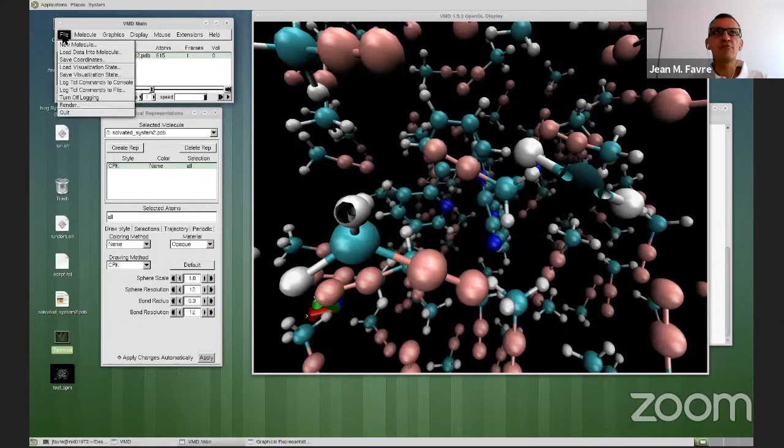Okay, people should be seeing this particular desktop I have here. So basically, I have here the VMD application, which is used for molecular science, and I am running here a simple model showing you how the 3D graphics is working inside the remote desktop. So let me quit the application because I want to point out the look of it.

So this is the remote desktop. As you can see, you have your full home mounted on the node. You also have, as you can see here, the GPU available. So this is Piz Daint. So we have the driver 440 from NVIDIA running on the GPU.

Now, we are inside the VNC desktop, so all applications should be run with the vglrun prefix, as you would know. So I run vglrun, the name of my executable, this is VMD in that particular case.

And as you can see from my console display here, indeed, here we have the GPU and the multi-threaded characteristic of our compute node detected correctly, 24 CPU threads detected, and a CUDA device, which is here the Tesla P100 node.

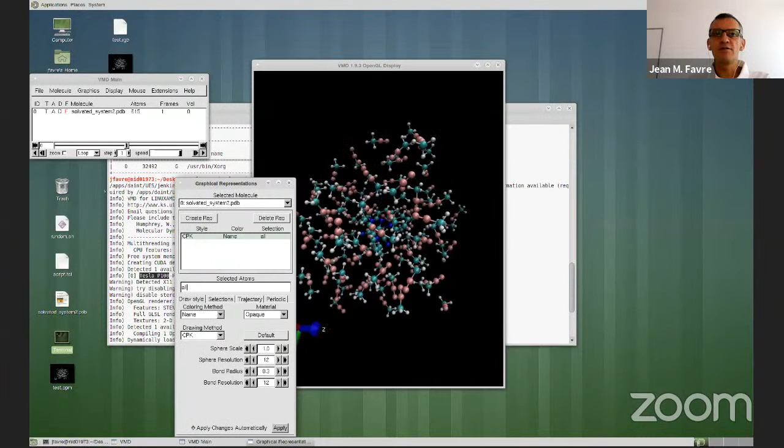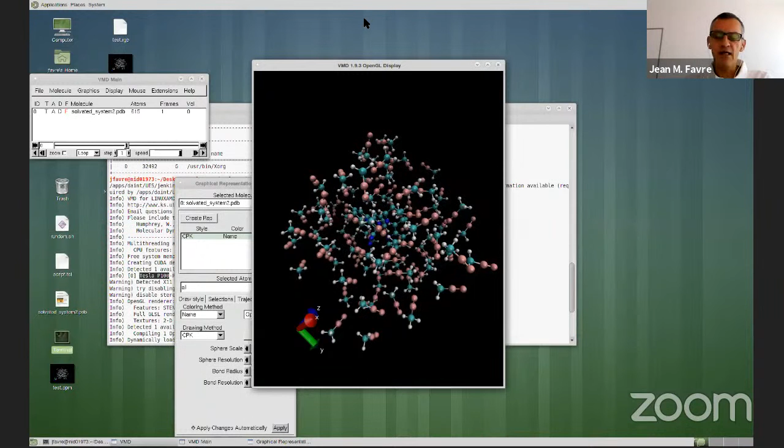All right, so that's basically it for the demonstration of the VNC desktop. As you can see, I have really the full applications available to do graphics. So VMD is a pre-installed package. However, you are free to run any other package requiring OpenGL and an X server.

All right. I'll come back here and share again my other presentation. Let's see. This should be just a second. Okay. This is what I'm sharing now. So I'm back on the VNC remote desktop page.

Very good. Now, VTK, since you are watching this particular webinar, I imagine that you've heard about VTK, right? VTK is, from my point of view, basically everywhere. There's not a single day that I am at the office without me using some parts of VTK. Now there's a nice address here, VTK in action, on seeing the different uses of VTK.

Now VTK is both, how would I say, a library. It's also a data format. VTK is at the base of it a C++ library, which is available in VisIt, in ParaView, and in Jupyter Notebooks, as we will see in the rest of our presentation today.

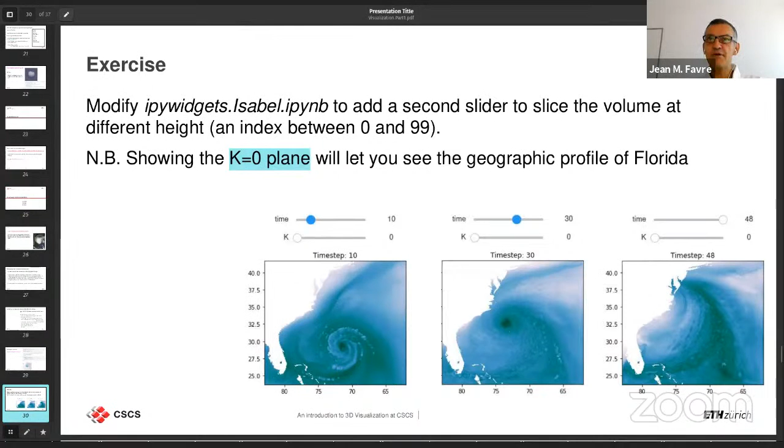So let me switch to the Jupyter notebook, which I have live, and it should be this one. IPywidgets is this one. There we go. So, basically what I've done here is, this will take indeed a few seconds, maybe a minute, because we have to load 48 time steps. And what I recommend is that you change here, for example, this time argument to do a subsampling in time of your animation. This would be much quicker to go through the animation.

All right, I will try to finish in the next few minutes. So I will introduce the next demonstrations while this particular demo is loading. All right.

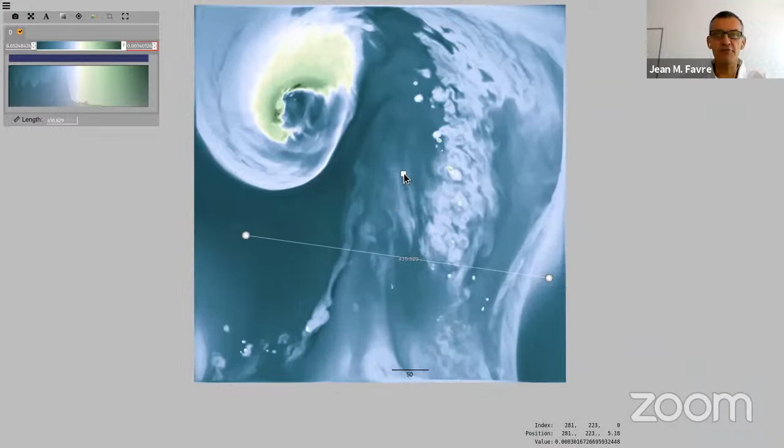If I bring back my panel, you can see here I have a whole choice of different color maps, etc. to use. And I have a measuring device; from here to here, for example, would be size 410, and I have different options. One last interesting option is the full screen option. Here you should see my data really at the full screen available. So this for the standard view.

I'm going now to the line profile presentation. So I have the same view again, but I have an interactive widget. Perhaps I should make my screen a little bit bigger. This widget allows me to profile the data at any point in space along my image. So that's a nice interactive tool. And because this is a standard Matplotlib family of widgets, I can always save that image to my desktop, and I can do different zoom, etc., as you can see here, inside my particular function.

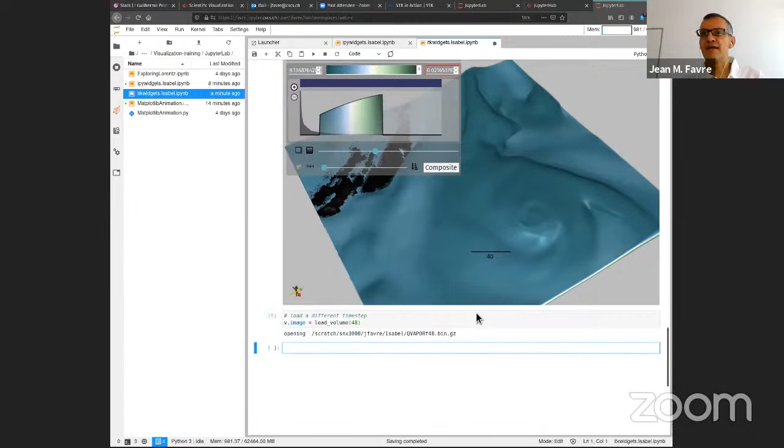The last demonstration to do here is with the load volume. So I'm going to load the volume at time step number 1, and I'm going to display that volume here in 3D. So I now have a full 3D rendering of the volume. Of course, it's a very flat volume because it's atmospheric data. And this is time step 1. If I go now to my time step number 48, there we go.

We can see that the hurricane has developed further, and we have a full 3D view of my data. Now, the interesting thing is that we have a completely interactive way of manipulating the rendering. As you can see here, I can really interactively search through my data set to look at particular features using volume rendering. So this is something we will do further this afternoon to look at 3D volume rendering of data.

In summary, these ITK widgets give us the possibility to do 3D rendering, as I have here in this particular cell, line profiling in 2D with any data set, and we can do more. We can do 3D rendering of polygonal data, 3D rendering of point set data. So we really have a lot of options available, and I encourage you to use that.

This is developed actively by the Kitware company providing VTK and ParaView. So this is really a nice addition to the family of tools which the Kitware company gives us.

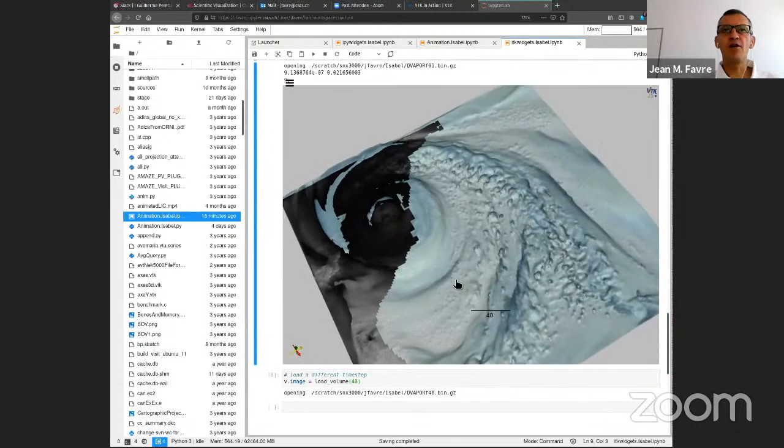This gives me a live 3D object where I can modify at will the characteristics of the 3D volume rendering and also the time step.

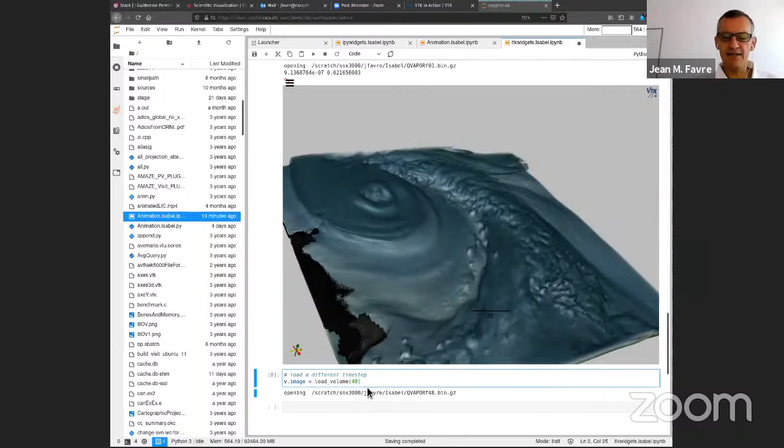We said that the hurricane hit the ground at time step 40, more or less. My notebook is not live at the moment, so I currently have only the cached version of the 3D data.

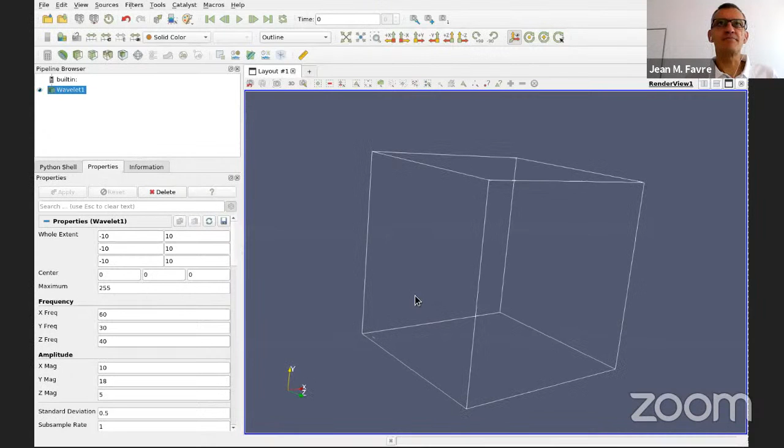I'm going to explain a little bit what we see. First, let's go to a wireframe model here. We see a cube, and we can count how many grid points we have here in each dimension. We have 21. Why is that? It's because I used the default value of whole extent here, between -10, +10, -10, +10, -10, +10. That gives us exactly a volume of 21 cubed.

If we look at, so basically, what are those numbers? Those are the IJK indices in your grid.

If I look at the information tab in my wavelet, I see indeed a resolution of 21 cubed. I see the X coordinates, which are the bounds - the X, Y, and Z coordinates range between -10 and +10. And then we see one data array called RT data, of type float, with a particular range between 37 and 276. This is the range of the scalar data available.

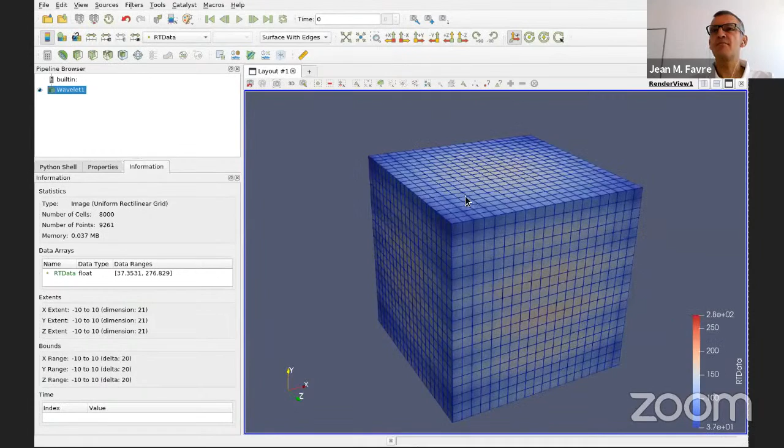Now, if I go to that particular drop-down menu here, I can select the variable RT data, and I will color my grid with the data indeed. Then we remove the wireframe, and we see a block of data, a volume of data, colored from blue to red, in this particular fashion. Let me look, I see there are some questions here, perhaps.

Questions? Yeah, I'm not sure I can answer those questions at the moment. So let me continue with my presentation here.

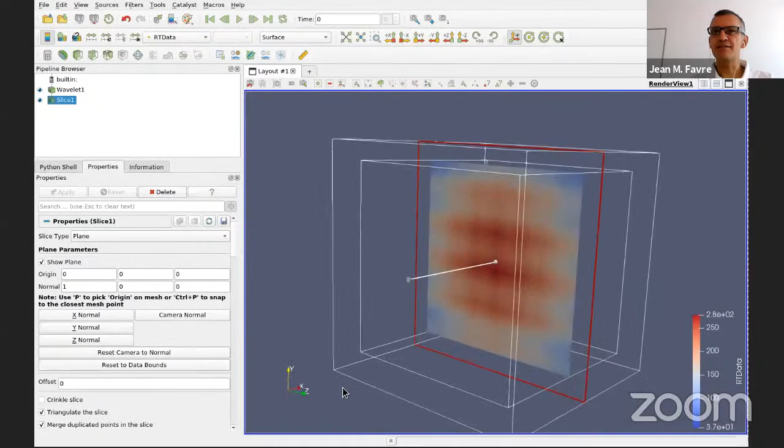Now, I can turn back the display of my object here to an outline mode, and I can look inside the data. I would use, for example, the slice here, which by default would be the X, the slice perpendicular to the X axis. I can also switch to the Y axis in that particular fashion, or to the Z axis. Or I can do something completely free, like this, and I have an arbitrarily oriented slice through my data.

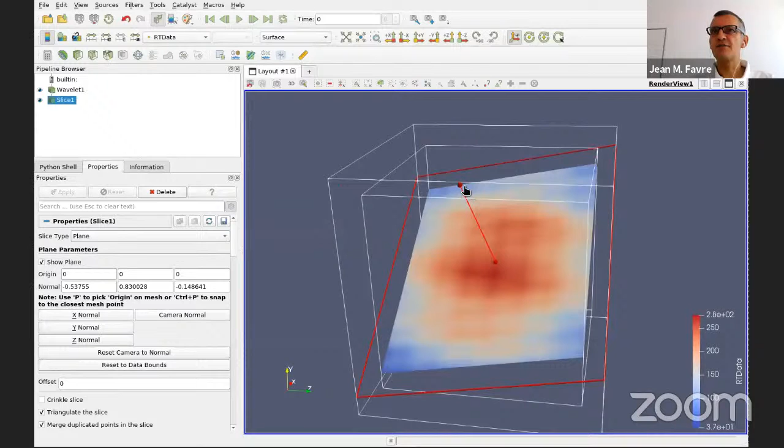Now you notice that every time I change this here, I have to click the apply button. This could be pretty cumbersome. If you have some pretty quick computation to do, you can switch ParaView to an auto apply mode. So in that particular fashion here, as you can see, I have an interactive slicing tool through my object. Here I'm rotating the object in 3D. I can also translate the object, etc. Okay, very good.

I'm going to delete the slice and think again about this volume of data. Now, a grid of size 21 cubed is very small. Let's make it bigger. I will go from 0 to 511, to 0, to 511 again. Now you notice that I'm counting, this is 0 based. So when the extent of the grids are 0, 511, it actually means 512 grid points in each direction.

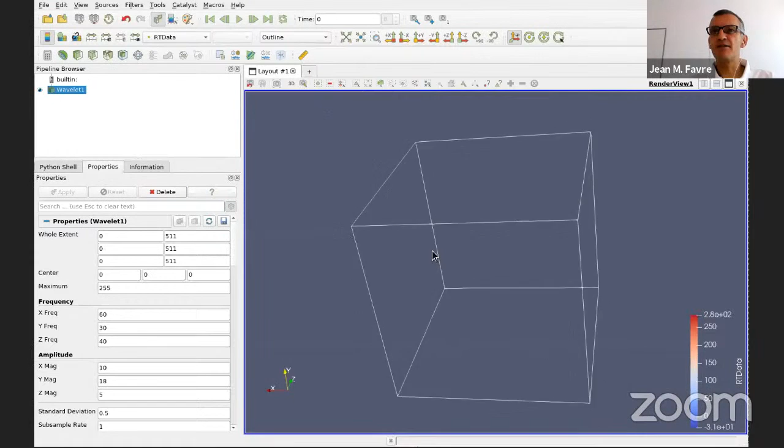So there's now my new volume. If I look at the wireframe, it will be, as you see, a lot more dense, and it's only if I zoom in quite a lot that I see the wires and I see each grid point.

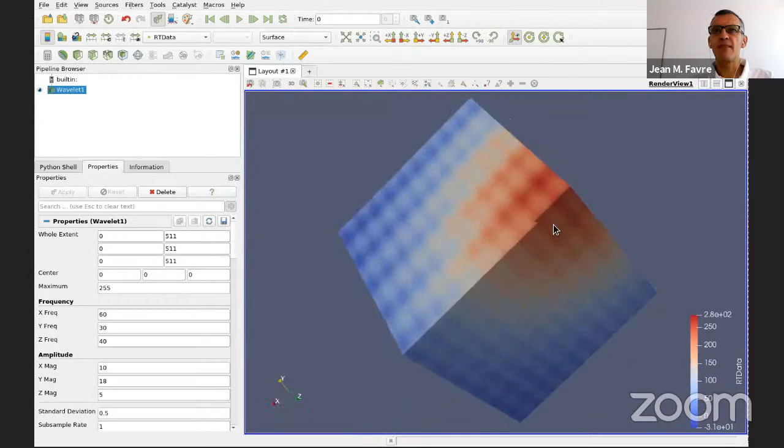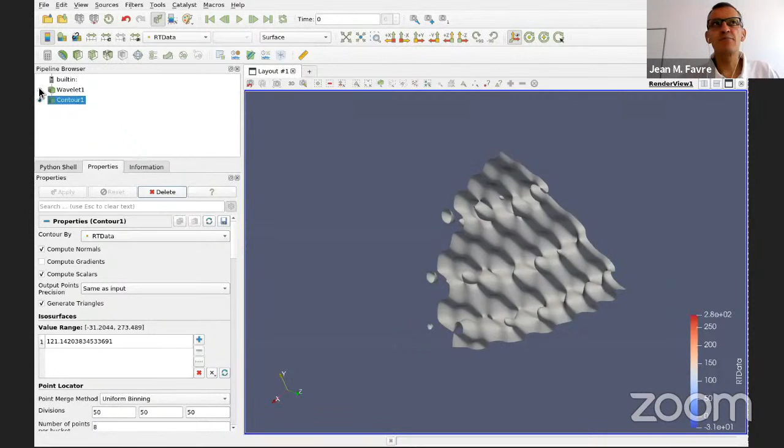Now, another way to look at this particular volume of data would be to look at a contour surface. Now, we've seen two things here happening. By default, in ParaView, when you add an additional filter here to this pipeline browser, the visibility of the object above it is turned off. So I can turn it on again by clicking on that particular eye icon.

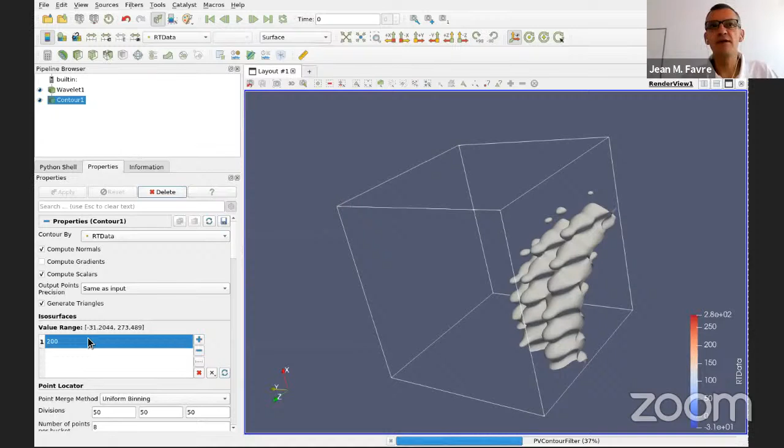Switching it to the outline mode, and now you can see that I have an ISO surface inside the 3D volume. As I move, as I select, as I change the value of this ISO contour, I have here a different ISO surface. Okay.

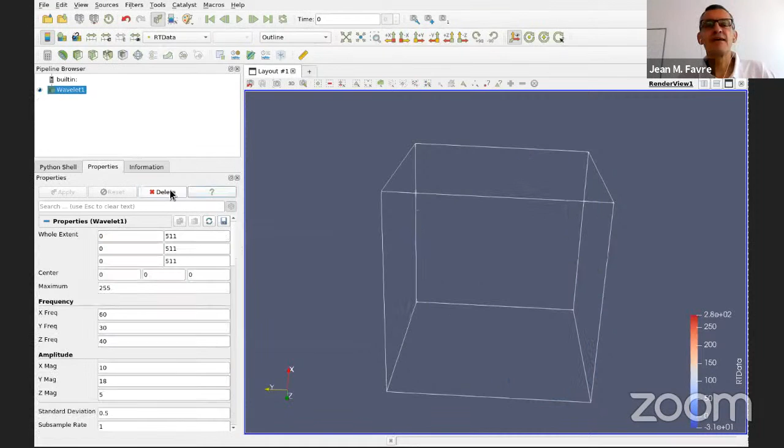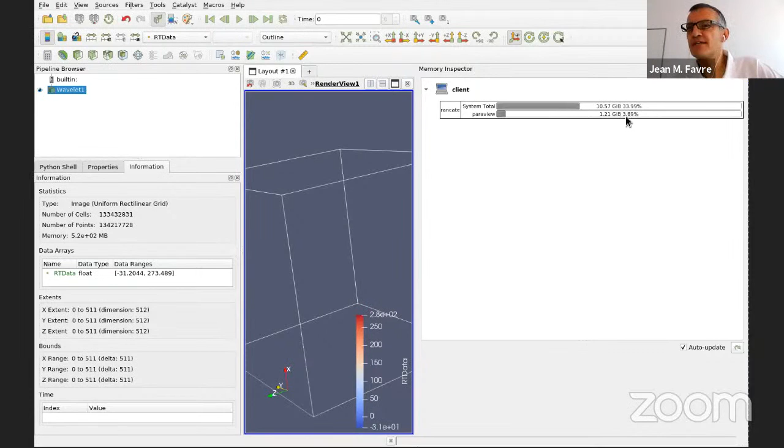Now I'm going to get to the point of storage and data format. Back to my volume: the size of my grid is 512 cubed, and ParaView tells me it takes 520 megabytes of storage. I can look at my memory inspector, and it tells me that ParaView is using 1.2 gigabytes of data to load my data. Well, fine.

That's good and well. Now I want to load this data in parallel, so I'm going to save it to disk. This is something you can do on your own desktop as well. If you do save data, here I have different options.

And there comes the question of data format. Which data format should I use? Should I use XDMF? XDMF is a combination of an HDF5 storage and an XDMF descriptor, which is an XML-based file format. Or should I use TIFF? Should I use PNG? Should I use the legacy VTK file format? No, I'm going to use the meta image MHD file format.

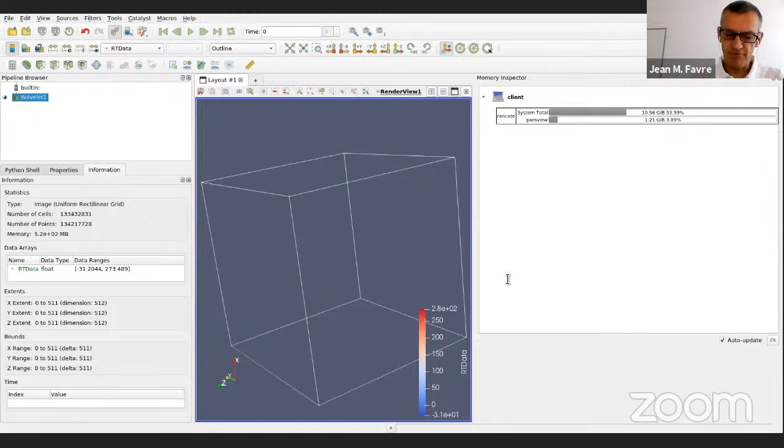So I'm going to call this volume.mhd. And I'm going to quit. Oh, it takes a few seconds, I guess.

I seem to have frozen my application here. Just a second, bear with me, folks.

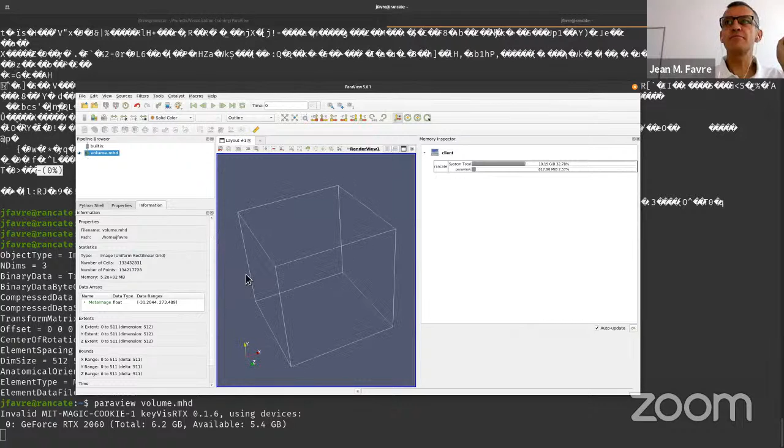Now, do people still see my ParaView desktop here, my ParaView application? Yes, okay very good, thank you. So there's my volume, and there's no problem with it. I can still color with the data as I did earlier.

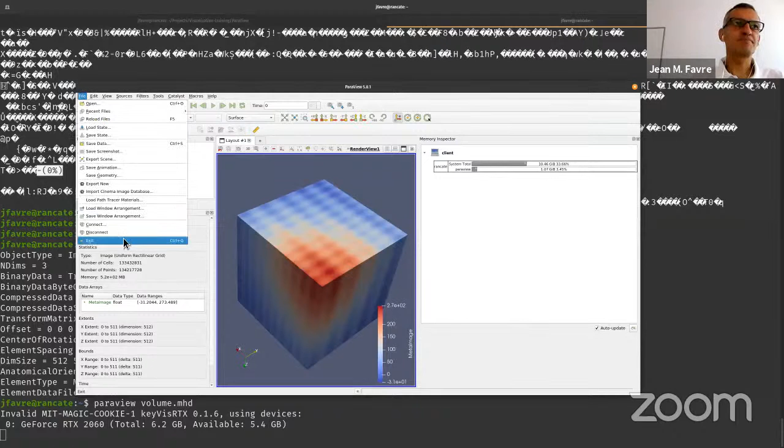Now I'm going to run in parallel, and this is going to be interesting because this would be the exact same thing that takes place in client-server mode when we are connected to ParaView. Let me do it in a very explicit fashion so that you understand what's going on. I run mpiexec with 4 processors.

And I run the PV server, which is an executable, part of the ParaView family of applications. PV server is the remote side server. I run it on my desktop, and it's accepting connections, waiting for connection from elsewhere. So I'm going to say, please connect to my local host.

Now you should see again my ParaView screen, and I'm connected in parallel. There are multiple indicators in this graphical user interface which tell me that I am connected in parallel. The first one is if I go to the help menu, about, I see both client information and connection information. On the right side of this panel, the connection information tells me I have a remote connection with 4 processes, etc., and that the graphical card I use on my laptop is a GeForce RTX.

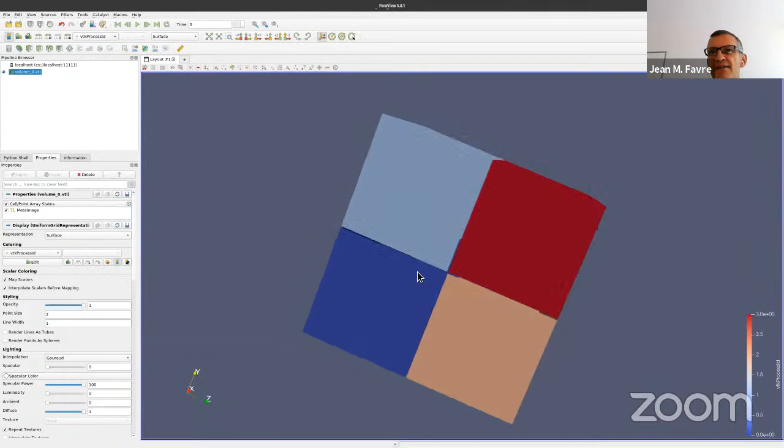I now have 4 different colors, which means that I have a completely load balanced visualization. The volume has been automatically divided into 4 different pieces by ParaView. And as you can tell, as I interact with the data, there's a little break here in the boundary between the colors. It really shows that ParaView is doing 4 different sub-pieces.

I'm going to quit, and I'm going to run not with 4 tasks, but with 3 tasks only. And I connect to my server again. I load my data. Data looks perfect. And I look at the load balancing. There, this is what ParaView did.

So what I'm demonstrating to you here is that we have a file format which is able to adapt to the number of processors available for the visualization. If I have 4, it divides the data exactly in 4 pieces. If I have 3 ParaView servers, it divides the data in exactly 3 pieces. The pieces don't necessarily have the same shape, but they have the same size in terms of megabytes.

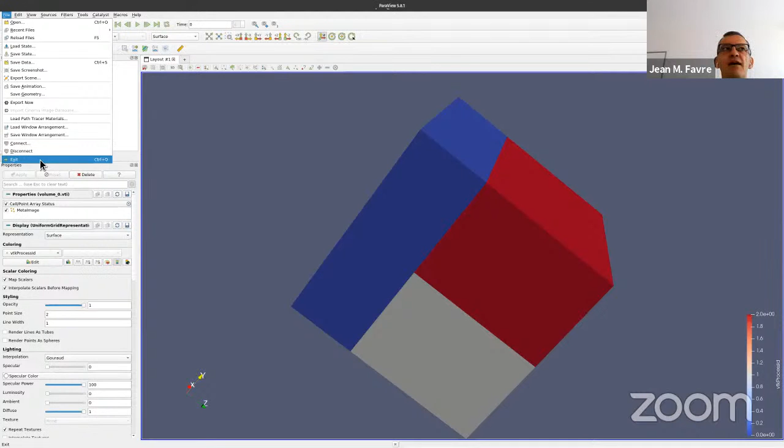So there's ParaView running in parallel. Now the same thing will be executed when we connect to Piz Daint in a client-server fashion. Let me go back to my presentation now. I need to share this particular slide again. So again, we can encode the data in multiple data formats, but the performance and the parallel support

will depend really on the exact implementation. So my advice to you is to consult with us at CSCS. If you are still in the phase of deciding on a particular data format, you should prototype, test that your data format will actually support the different visualization scenarios that you want to follow. All right.

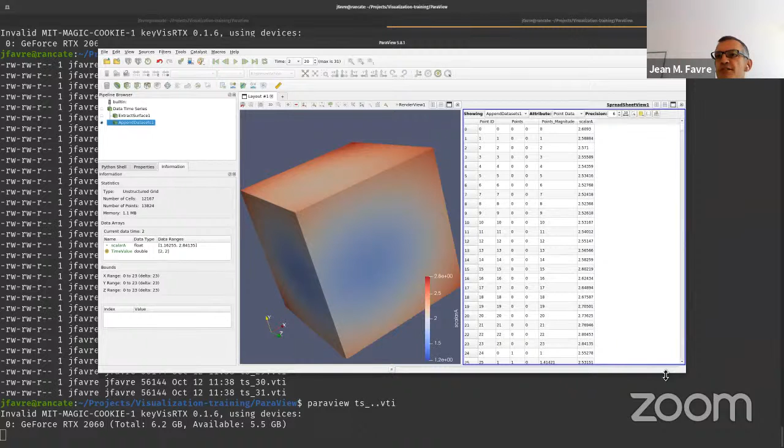if I look at the spreadsheet with the Append Datasets object, if I look at my cell data, this tells me that the cell type is voxels over here. And well, interestingly, it tells me that the cell type is always voxels, but it's a documentation issue. Here in the Append Datasets, I have an unstructured grid, and I guarantee to you that the cell type is hexahedral. There.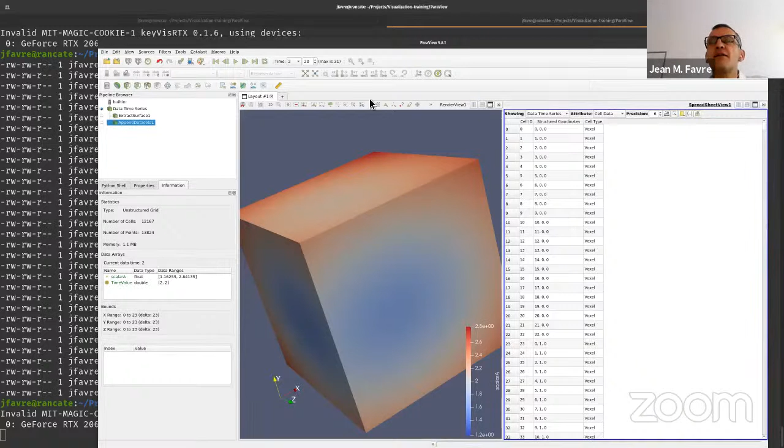All right, so I'm basically done here with the demonstration, and we've already introduced quite a bit of features of ParaView. We've seen this spreadsheet view, which you instantiate in the following manner. If I want to look at the histogram of my data, I would do it like this. There is a histogram of my data.

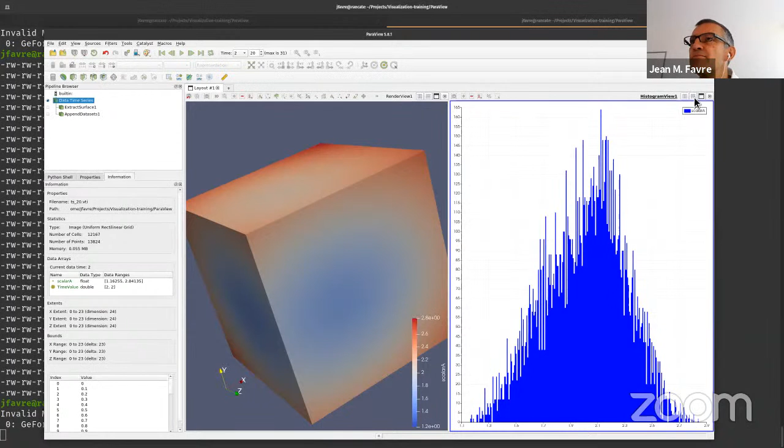Perhaps I went too fast. Let me redo it. I create a view called the histogram. The histogram is empty. And then I select the object and I make it viewable, the object that I want to show. In parallel to this, I can use a spreadsheet view. Okay, we've seen it earlier. I select here the object that I want to look at.

Okay, I have the structured coordinates here as one column of data, and then I have one column of data called scalar A. And this is indeed the floating point scalar field which is loaded in this volume. And we know from this particular panel, the information panel, that the minimum value is 1.16, the maximum value is 2.84. This is for the current data, this is for the current time step loaded.

Now, in this spreadsheet view, I have a very interesting feature. I can sort data by their scalar field value. So if I click in this particular fashion, I have the data sorted from top to bottom. And if I click it like this, I have it sorted from minimum to maximum. And indeed, the minimum is 1.16. It matches the data I have here.

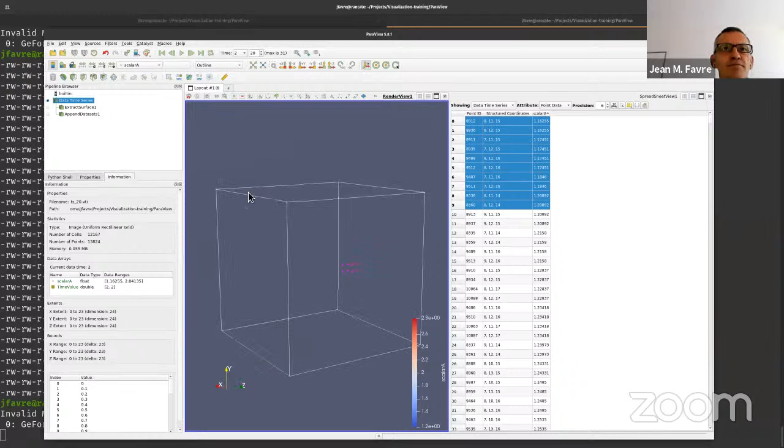And those values, well, we don't see them right at this time because the object is not visible, but now I see them. In the data time series selected, if I make the same object viewable in the same 3D view, those purple points are exactly the nodes on my grid which hold the 10 smallest values of my scalar field.

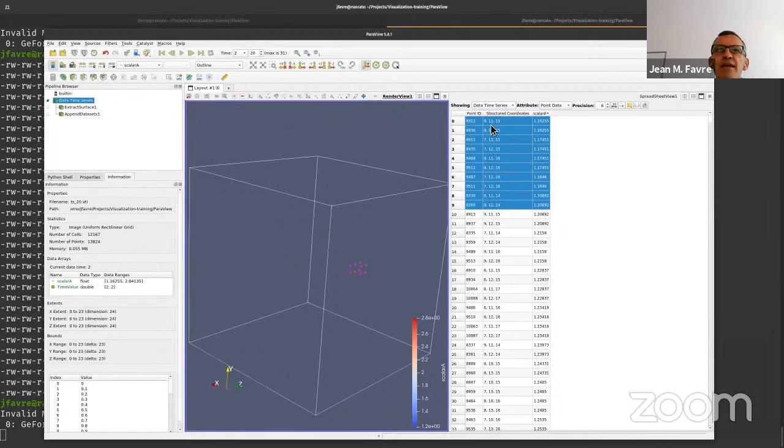Okay. Now, here I have the coordinates. So I know exactly the IJK coordinates of those points. So if there is, for example, a bug in my simulation, I can find exactly the IJK coordinates in my grid where to look for a possible problem. Now I can extract those particular data by using the filter called Extract Selection right here.

As you can tell, the point ID, which is the vertex ID, which I had in the, there we go. Those point IDs match exactly what has been copied over here as the selection of points. If I apply this, I now have in my display exactly the ten. When you do it like that, let me make them a little bit bigger because we don't see them. Here are the points.

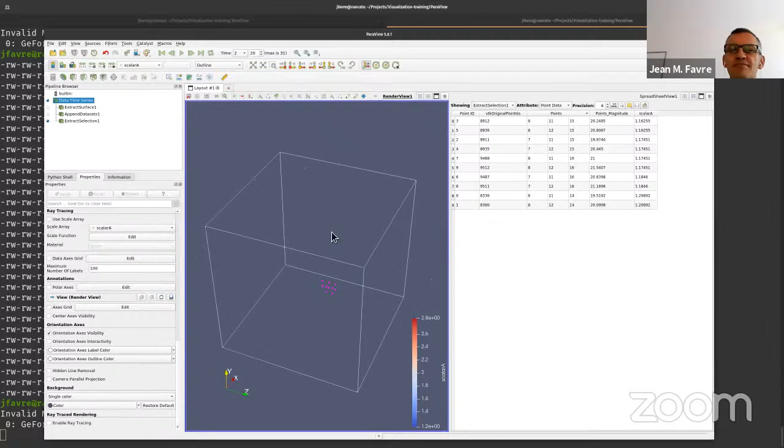Okay, I'm sorry, 10 numbers in my grid over here are exactly the data matching my particular criteria. And I'm going to do a final demonstration here of the ParaView interface.

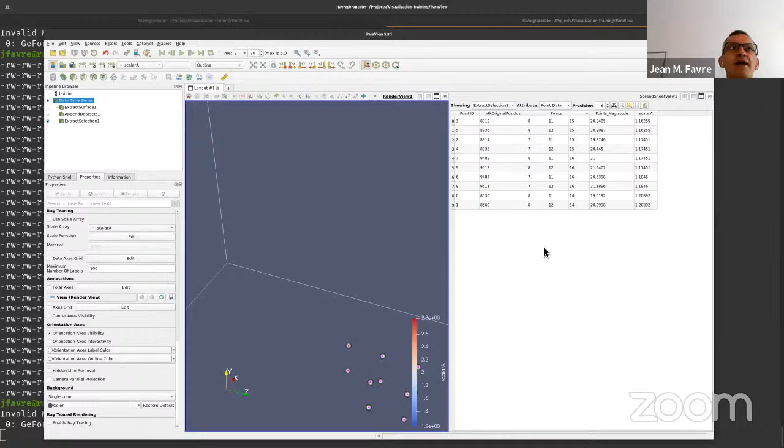Remember my question about finding the maximum of pressure. So, okay, in our case, the scalar field is not called pressure, but it's called scalar A, but that really doesn't matter. So there's my volume. I'm going to go to the Find Data menu, select the point in my mesh where the scalar is maximum. And I'm going to say run the query.

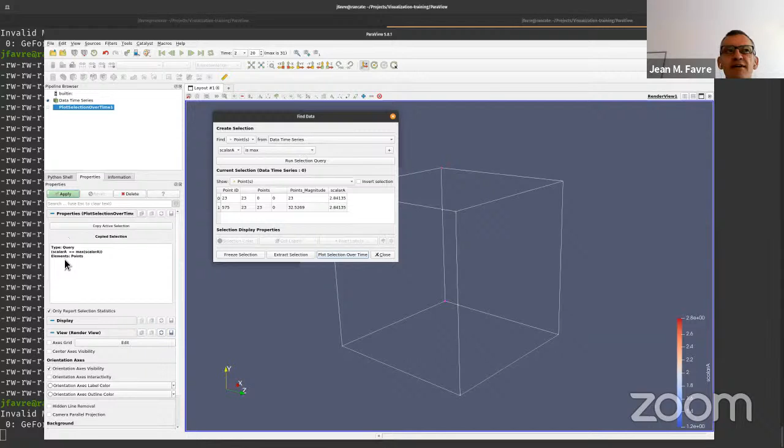And then I'm going to say plot selection over time. Look at my query here. The query is find the scalar value equal to the maximum and run this over time. When I say apply, there's my interface. ParaView has automatically loaded all the time step values. It has searched for the maximum of the scalar field for each time step.

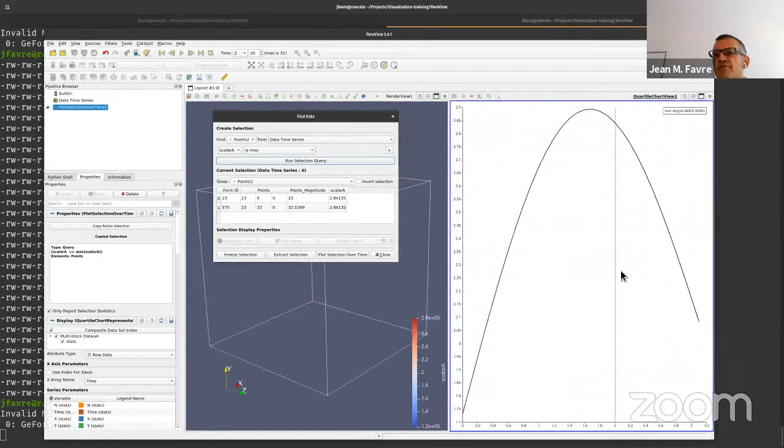It has drawn a graph in an XY fashion with the curve connecting all those maximum points at the different time steps. And the green line that we see here shows exactly the time step where I am at the moment. So this is time step 2, as you recall. Now watch, if I go to a different time step, 1.2, the green line here has switched back to 1.2, and it tells me exactly where in the graph I am currently located.

And as I animate my display, we're going to see this move along. There we go. So let me reset to time step 0 and animate. So this gives us, if you want, a linear in time indication of the maximum of data in that particular volume. There. Is there any question on this particular demonstration here?

Basically, I have loaded a time series of data. I have shown to you how I can extract some data following a particular criteria. For example, find the 10 smallest values of the scalar field at a particular time step. I have demonstrated to you how I can find the maximum of that scalar field for all time steps and do a graph of that particular variation. And basically, that's what ParaView is about. It's not only about doing nice 3D graphics, but it's really about query and analysis of your data.